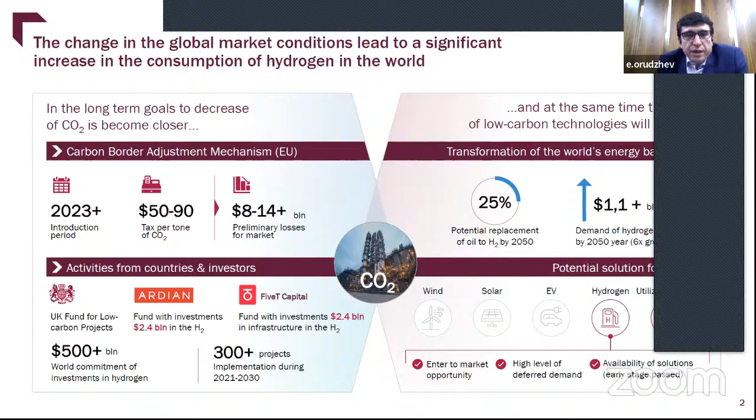So that is why, the next slide - we, as an investment holding, are considering new opportunities in the global low carbon economy, and decided to single out a new subsidiary, a new SPV, to search for technologies and invest in promising technologies that will be in demand in the new environmental reality.

For example, one of the products we are investing in, together with Omsk Carbon Group, the largest Russian and world's 8th largest producer of carbon black, we are developing a pyrolysis technology that makes it possible to produce raw materials suitable for carbon black production from non-recyclable plastic. The results we have achieved by catalytic pyrolysis are currently the best in the world, from what we know, and it really helps to utilize plastic and produce carbon black from the waste plastic.

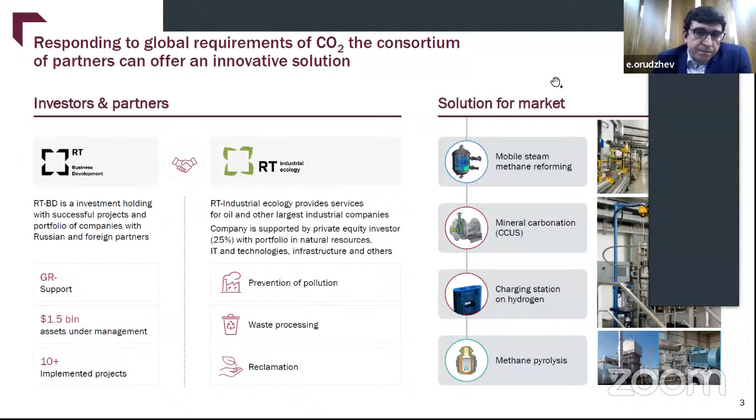So that is why, of course, everybody tries to change the method of production of hydrogen, but still the production of hydrogen from natural gas is the cheapest way to produce hydrogen today. There are some reasons we believe that producing hydrogen from natural gas will still take a large amount in the new energy reality.

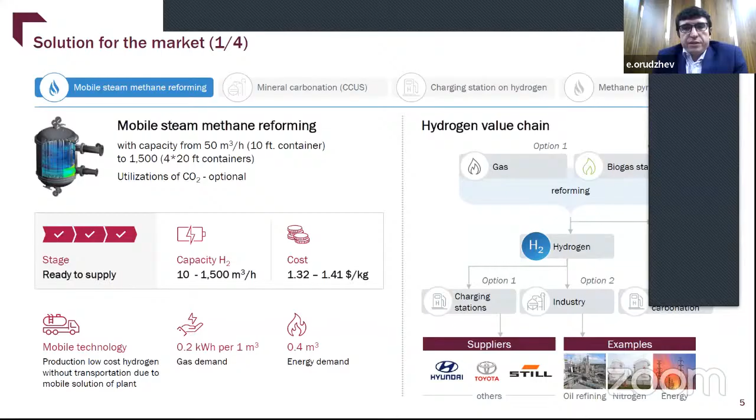We have several decisions for the market using these assumptions. The first one is a mobile steam reformer. It allows us to produce hydrogen from 50 cubic meters to 1,500 cubic meters per hour. Our solution combines both reformer and steam shifting in one reactor and allows us to achieve impressive efficiency.

The compact arrangement of the equipment allows us to use heat recovery efficiently. This solution will make it possible to organize local production of small amounts of cheap hydrogen near the place of its consumption. Besides, this solution will allow removing infrastructure restrictions for the implementation of transport and other pilot projects using hydrogen, because the price for hydrogen is really cheap, around $1.5 per kilogram.

This solution is fully ready, and it has been subject to technical audit by two players in the hydrogen production market. Using this decision, we are trying to start some pilot projects here in Russia and then in Europe. The next slide, please.

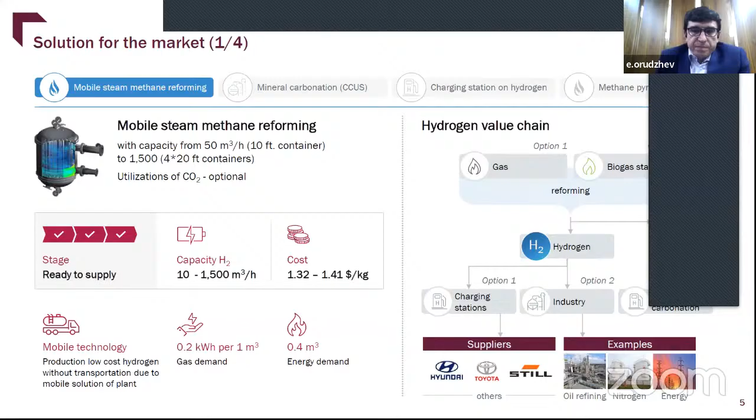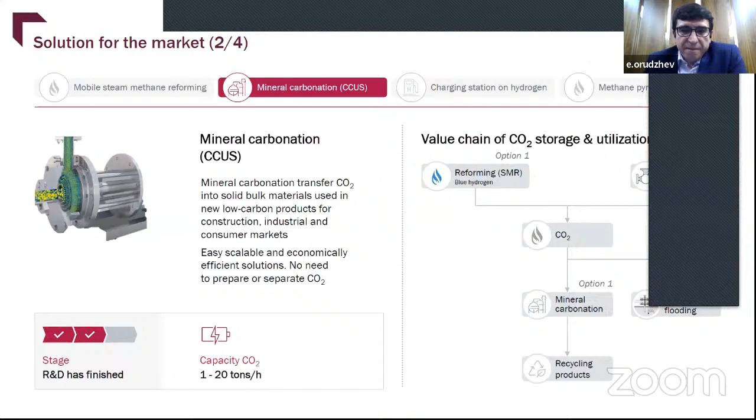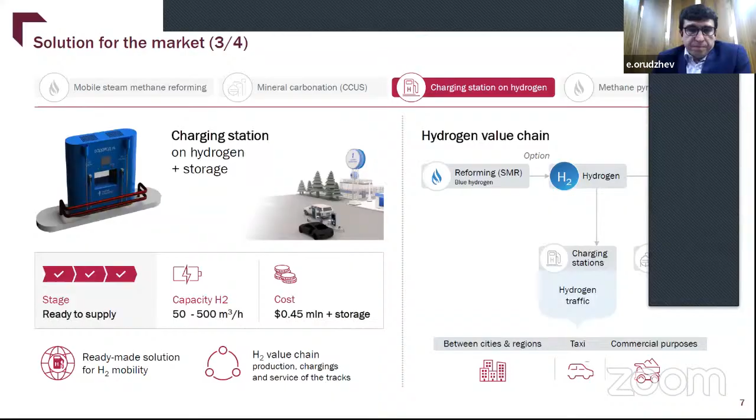Methane pyrolysis. This technology is at an early stage. We are considering the technology of pyrolysis in molten iron. We actually did R&D, but do not have an industrial example of this equipment. Actually, this technology allows us to have the lowest energy consumption for the production of hydrogen.

A separate issue is the possibility of obtaining high-quality carbon black. We have agreed with a carbon black producer to deal with carbon extraction and remediation. We actually believe we can build this technology, from 5,000 cubic meters of hydrogen per hour and upward.

The main issue for us is the consumer of hydrogen. We try to find a company who can replace current hydrogen consumption from steam reformer with carbon-free pyrolysis. At the same time, we are ready to invest independently in the creation of the installation itself. So we actually want to build this producing example, but we really need a consumer of hydrogen. Actually, that's all.

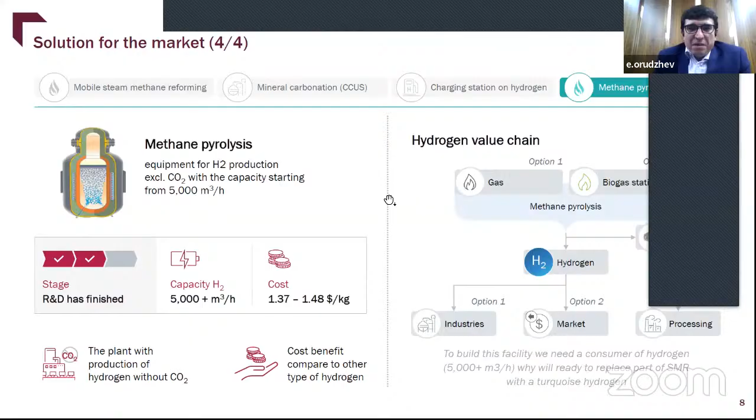I'm happy to answer your questions. Thank you. Okay, thank you, Eldar.

I just want to say a few words about the issue of today's event. Of course, everything which concerns hydrogen we can consider as innovation or some innovative technologies. That is why, from this point of view, all the activity of your company corresponds to innovation in this sphere of development of technologies. So later on, please prepare to answer questions which probably our audience will ask you.

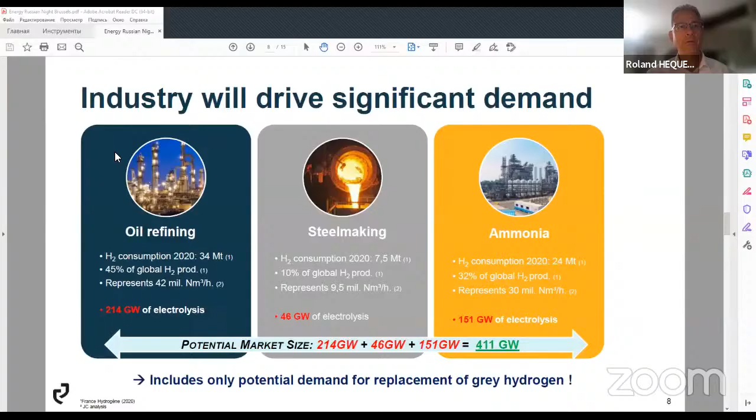Thank you very much, Mr. Petrikov, for the introduction, and thank you, Mr. Orudzhev, for this very good introduction to the hydrogen matters. And thank you for inviting me. It's my pleasure to be with you here tonight.

So the purpose of my speech tonight is really to talk about large scale. Russia has big plans regarding hydrogen, and so does Rostec. Russia is planning to export 200,000 tons of hydrogen by 2024, and according to my information, 2 million tons by 2035. So those are very massive volumes of hydrogen that will be produced in the next years. Next slide, please.

So a few words about John Cockerill. We have a 1 to 1.5 billion euro turnover. We're more than 5,000 people worldwide. We've been in business for more than 200 years, and we've been in hydrogen and electrolysis for more than 30 years. Next.

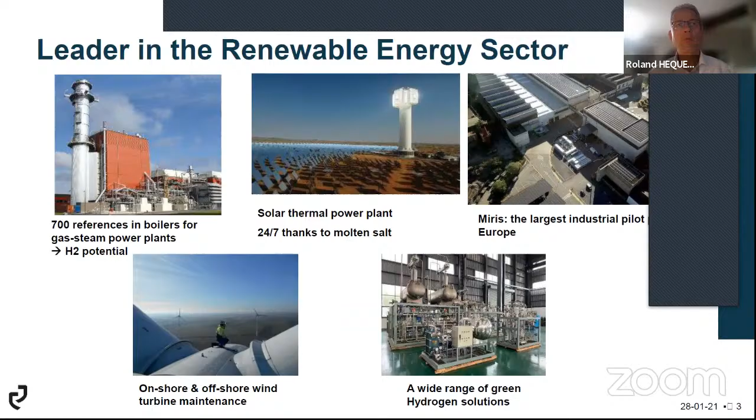We are one of the leaders in the renewable energy sector. First of all, we're one of the world leaders regarding large boilers, the combined cycle for gas, and now including hydrogen.

We stepped into solar activity. You can see a solar plant here where we supply the boiler as well as the molten salt loop, which allows us to produce electricity 24 hours a day, 7 days a week. In the next picture, you can see the largest industrial pilot in Europe, at our headquarters in Belgium, in Liège, with 10,000 square meters of photovoltaic panels and a capacity of 2 megawatts. We're also active in the maintenance of wind turbines and, of course, in hydrogen.

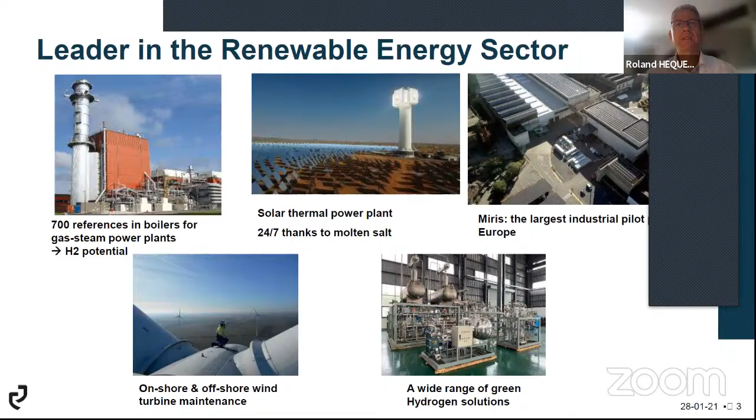So we are the #1 in the world in water electrolysis, for the production of green hydrogen. We've got over 30 years of experience, with more than 1,000 references in different sectors: chemicals, fertilizers, ammonia plants, glass making, aeronautics, steel making, power plants, non-ferrous alloys, mobility, power to gas, cement, etc.

We've got the largest electrolyzers in the market, and those large sizes will be necessary in the future. You can see on the truck at the bottom right a 5 megawatt electrolyzer, which was delivered in the frame of the Winter Olympics next year, which will take place in China.

We've got pressurized alkaline technology, which we believe is extremely suitable for renewable electricity sources. We've got large manufacturing capacity, which is important to feed future production plants, and we've invested massively in this technology, more than 100 million euros in the past years, whether it's R&D or manufacturing projects. We can address production, distribution, and mobility, as presented in the previous presentation.

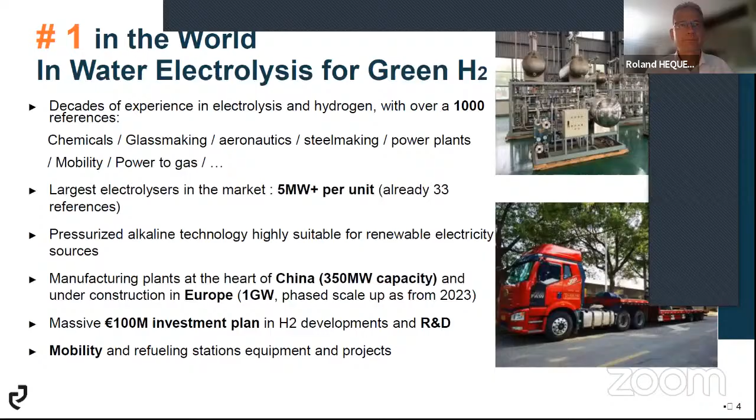Here is a quick glimpse of the value chain. We go all the way from high voltage electricity generation to distribution to the off-takers, whether it's industry, mobility, or power to gas. It includes the electrolyzer itself with a stack where we break the water molecules and generate oxygen and hydrogen. This oxygen can be either vented or reused in several applications, like oxy-combustion, for example, in many industries.

Then we've got what we call a separation skid, where we start purifying the gases, then a purification skid to further purify. We can achieve 99.999% purity for applications in mobility, for example, cars, buses, trains, or other applications. We dry, and then we've got compressors for most applications, compressors and storage.

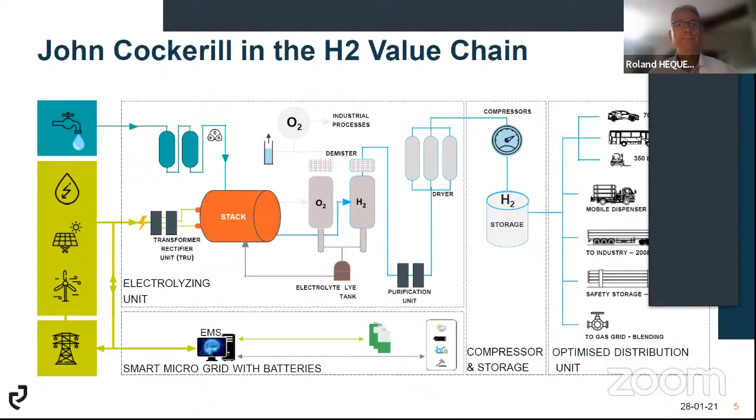Pressurized alkaline electrolyzers is, we believe, the solution. It's a very rugged technology, and the fact that we have pressurized hydrogen at the outlet of the electrolyzers is extremely important. First of all, it saves in capex because you need to supply fewer compressors.

Here, when you start from atmospheric pressure, you need 4 stages of compression to reach 32 bars. Of course, we also don't need electricity consumption dedicated to the compressors. That saves about 3.5% of electricity.

We've got a very high reactivity to capacity variation requests upstream. So, for example, with a wind farm or photovoltaic panels, there are changes in power during the day, and this type of electrolyzer perfectly matches those variations. We've got a decreased footprint because we don't need as much room for compressors, and less maintenance, since compressors are always the weak point in this type of plant. As a result, we've got much better plant availability.

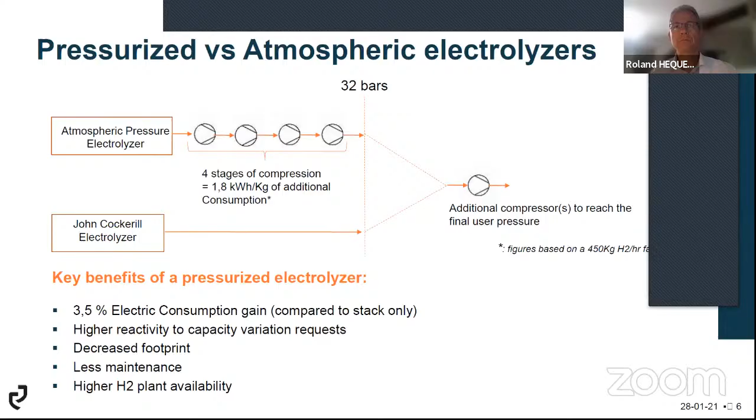So we can really follow up on renewable energy sources. Power variations can be up to 5 to 8% of nominal power per second, which is plenty for solar or wind applications. The capex is also extremely low because of large stacks, and we don't use any noble material like platinum or iridium, which is really starting to cause a problem. We can cover the full power range by varying the number of stacks in our installations. Here you can see a gigawatt facility that we have equipped with hydrogen.

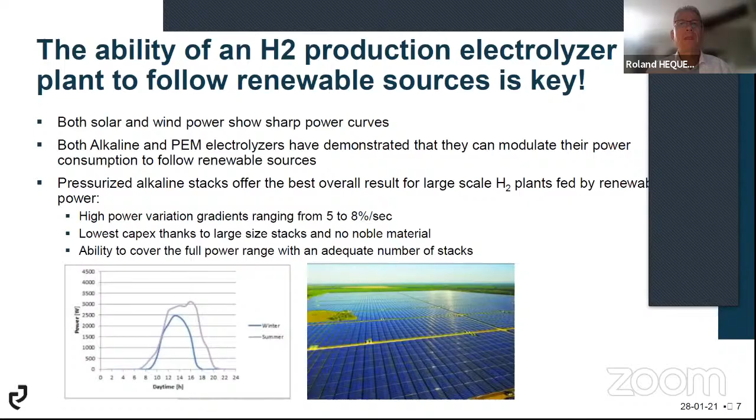Industry will drive significant demand. Here you've got the 3 largest off-takers of hydrogen. The first is oil refineries, the largest consumer, followed by ammonia plants, and then in the next decade, steel making, rather than having blast furnaces and coke plants, we will have steel made by direct reduction of iron ore. All those applications will require tremendous capacity of hydrogen.

And in most places in the world, that will be required without producing CO2. For 1 kilo of hydrogen produced from natural gas, 10 to 12 kilos of CO2 are generated. So, of course, we want to eliminate this because of climate change and other impacts on the planet.

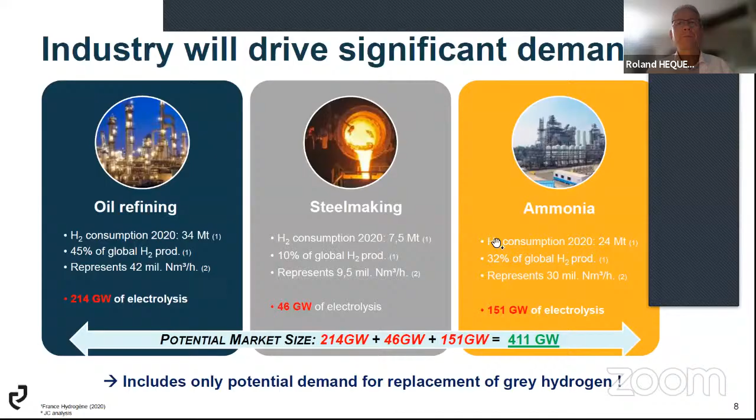For all those applications, we will need large quantities, and those facilities will range between 500 megawatt and 1 gigawatt plants. They will require very large stacks. I already introduced that we have the largest stacks, and we're still moving towards larger stacks, with 33 references of those 5 megawatt stacks.

On the right-hand side, you can see the largest solar plant, the largest hydrogen plant powered with solar power. It's 1 gigawatt. Right now we are at a 110 megawatt hydrogen plant, and we are ramping up towards 500 megawatts. We also developed a very large project, one of the largest in Europe, 75 megawatts with Engie.

Probably you know this very important energy player, Carmeuse, the number 2 producer of lime in the world. We will produce e-methane in this facility, combining green hydrogen with CO2 extracted from the fumes. On the bottom right, you can see the site of Zhangjiakou, the Olympic Games, where a 6 megawatt stack will power 85 buses in the Olympic Village.

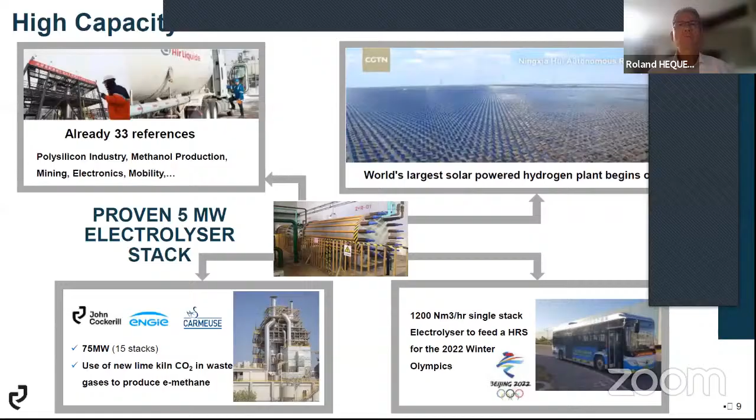You can see what a 1 gigawatt hydrogen plant could look like. Our aim is to produce 20 megawatt stacks, so we are ramping up. We went from 5 to 6, 6.5. The next step will be 10, and little by little we are working our way towards 20 megawatt stacks.

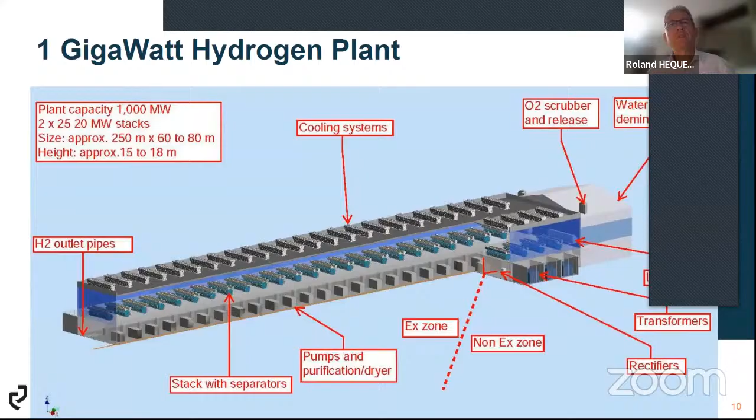I already introduced this project. This 75 megawatt hydrogen production unit will be able to save 900,000 tons of CO2 emissions over the next 10 years.

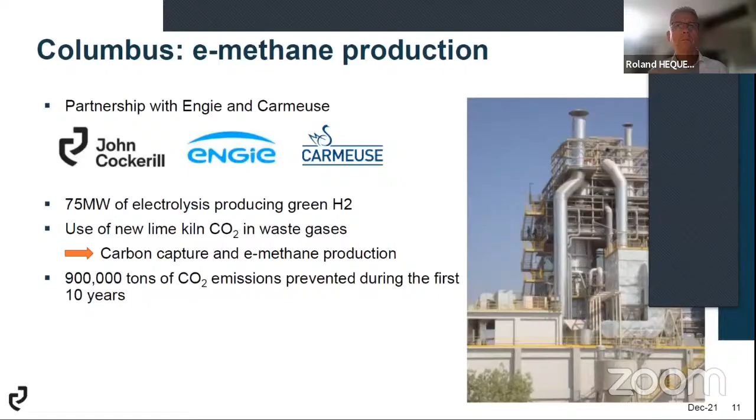Mobility is extremely important. Here is the example of a partnership we have with the 4th largest airport in Europe, or what will soon be the 4th largest freight cargo airport in Europe. It is in Liège, and we are right now in the execution phase. This mobility station will be able to feed 350 bar for buses and other logistics equipment, and 700 bar for light duty vehicles.

Here it's Methanol Production. This is 2 times 5 megawatt stacks that you can see in the picture, for a total of 10 megawatts with a purity of 99.999%.

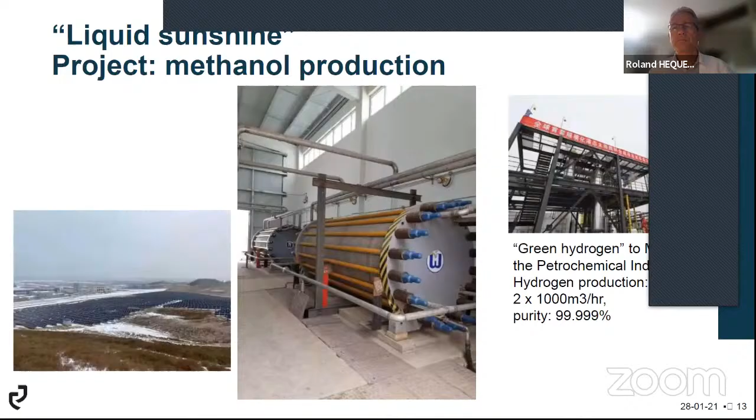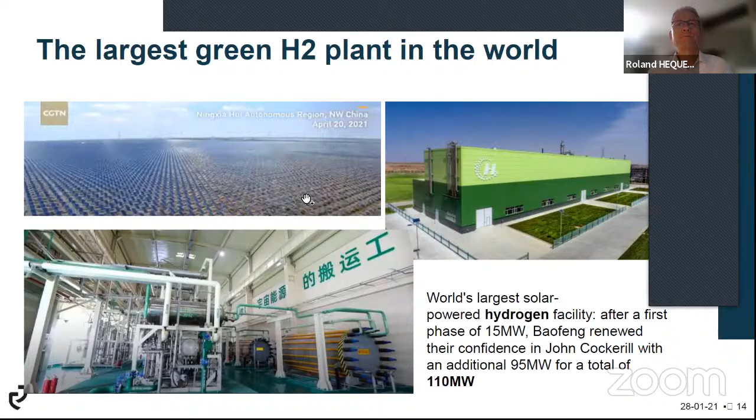Thank you very much for your attention. I am ready for any questions you may have.

Okay, thank you, Roland. Thank you, Eldar. Of course, I would say that this direction of industrial development is the most advanced at the moment, and it will influence humanity's future, because it corresponds to the green economy, the reduction of the bad influence on human life overall.

We heard a lot of references from Roland, and I want to ask Eldar first. You presented the concept of ready-to-implement products. Could you please specify the status of readiness of the technologies you presented for their implementation? A lot of references from Roland, and we want to hear some interesting references from the Russian side, please.